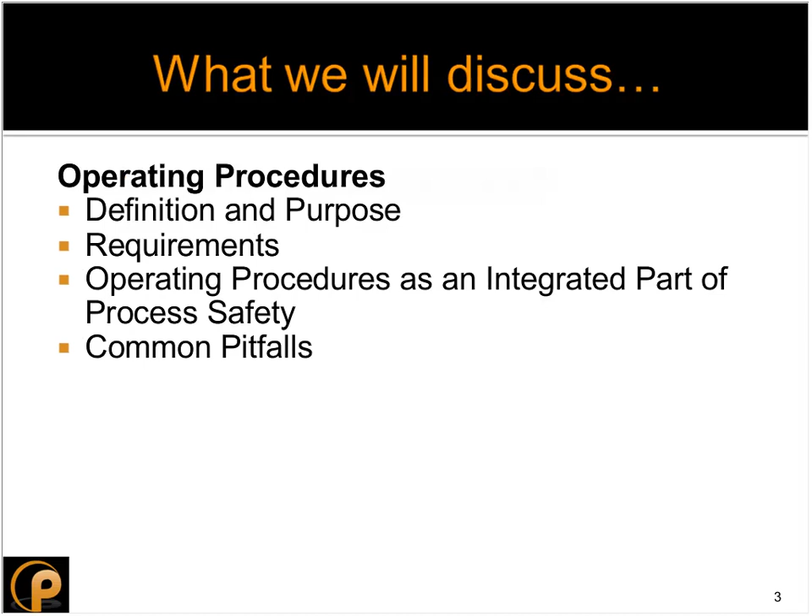Today we're going to discuss operating procedures: what the definition is, what their purpose is, what the requirements of operating procedures are, because you can't just write whatever you want. We're going to talk about how operating procedures are an integrated part of process safety management, common pitfalls associated with operating procedures. We're going to go through some case studies. We're going to talk about training personnel, what's required for training personnel, and also some of our recommendations for training. We'll talk about long-term management of operating procedures. We'll provide a summary, and then we'll have some time for questions and answers.

In general, the information I'm going to talk about today is going to seem very common. It's going to make a lot of sense. I'm not going to need to convince you a whole lot. It's not that you're going to be learning something new that you can't agree with. I think what will be iterated throughout this presentation is that even though the things we discuss about operating procedures, all the good stuff and good reasons we have for having them, that's not the important part. The important part is that it's hardly ever practiced. We talk about all these great things we can do with operating procedures, but the problem is that a lot of institutions and organizations don't implement good practices.

I do have a couple of objectives from today's presentation. The first is that everybody understands why operating procedures are essential to safe operation of any facility. Understand what OSHA's requirements are, especially with regard to PSM, for PSM-covered facilities like refineries or chemical plants here in the United States. And then also for the audience to become aware of problems and pitfalls and some case studies associated with bad operating procedures.

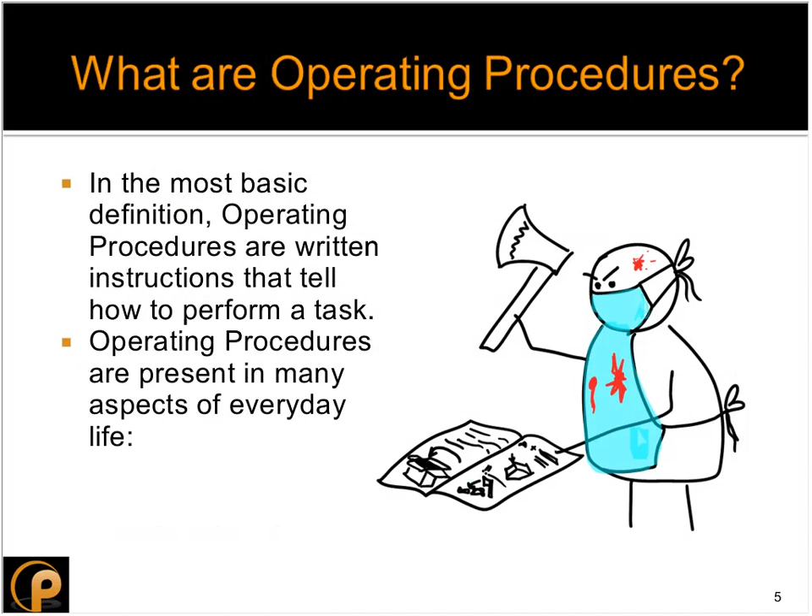So what are operating procedures? The most basic definition of an operating procedure is a written instruction set that tells you how to do something. We see it in every aspect of our lives, not just at work, but at home - cookbooks, putting together furniture, medical procedures that doctors follow. They don't just think about it on the fly. There's a procedure to go through.

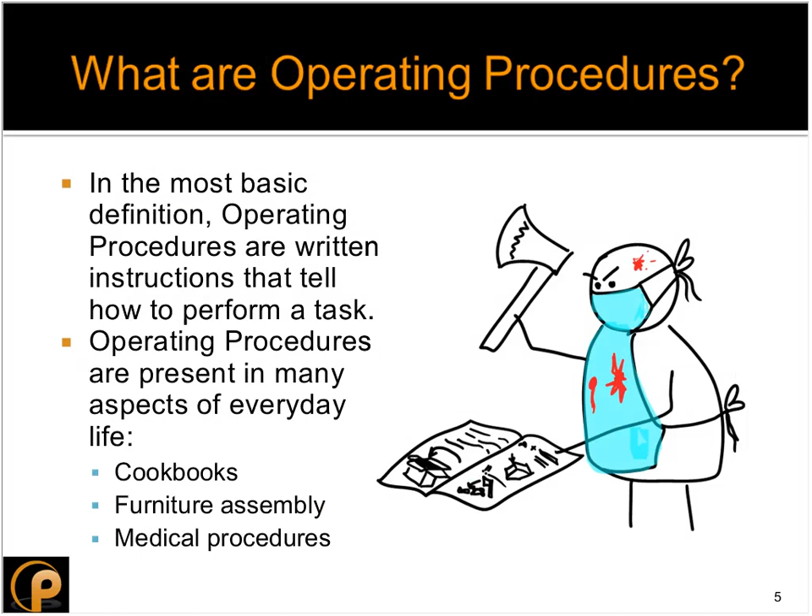All of the tasks have one thing in common: the results should match the intent of the operating procedure. And so it's important that operating procedures produce safe, reliable, and repeatable results.

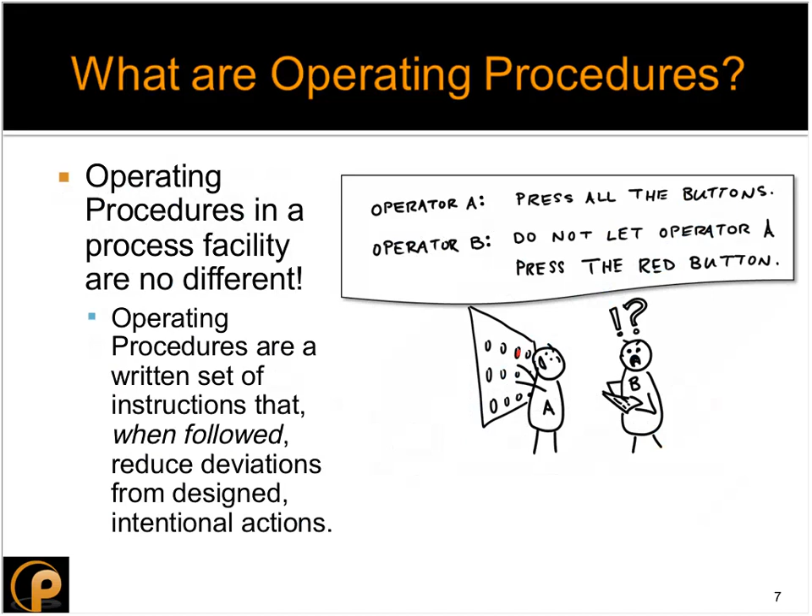Operating procedures in a process facility like a chemical plant or a refinery or a production platform or any other place like that is no different. You want to make sure that those operating procedures, when they're followed, reduce deviation from designed intentional actions.

Why do we need operating procedures? Well, I think some of this is going to be really obvious. First, to ensure safe operations. You want to make sure that people go home just as well as they came to work or even better by preventing injuries and problems with health. You also want to communicate health and safety precautions to folks as they're doing their daily routines.

You want to ensure consistent product quality because you always want to follow a given set of instructions and the given timing associated with your process to make sure that the product comes out at an acceptable quality level. It's also to protect profitability.

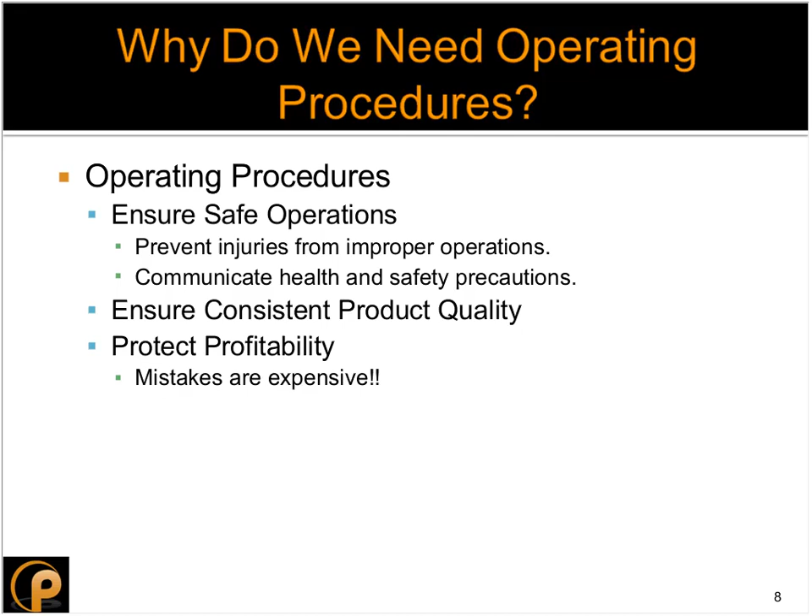So not only do we have to worry about people's health and people's livelihood, we need to make sure that we treat our processes correctly, treat our equipment the way that it should be treated according to procedures so that we don't have a mistake, so we don't have an accident, explosion, something that damages our property or worse, hurt somebody, because when that happens, it's really expensive. We also want to establish accountability. So well-written instructions will tell you exactly who is supposed to perform which step.

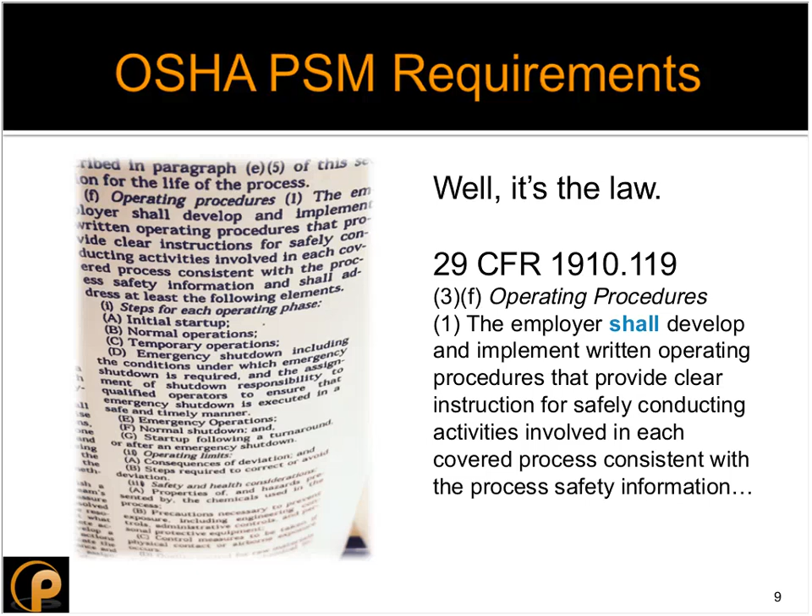And the other reason, of course, is because of regulatory compliance. It's the law, and it says it plain as day in 29 CFR 1910.119. That's the long-form version of the PSM standard. It's a federal law. It's what OSHA enforces for PSM-covered facilities, and it's plain as day in Section 3F. Operating procedures: the employer shall develop and implement written operating procedures, period.

So why does PSM require operating procedures? Well, kind of like we said before, we want to protect personnel from injuries and fatalities. And because not following standard operating procedures can lead to operators or users performing steps incorrectly or inconsistently, which can lead to problems, incidents, loss of containment, fires.

Operating procedures, according to OSHA PSM, are required for numerous different activities, including but not limited to initial startup, normal operation, temporary operation, emergency shutdown, emergency operations, normal shutdown, startup following a turnaround or after an emergency shutdown, all types of situations. You want to make sure that you have the right set of instructions for whatever situation your facility is running in.

In addition to that, the operating procedures must also provide clear instructions on how to do stuff. They've got to be readily accessible. You can't rely on somebody having to run to a library half a plant away to go find operating instructions. They need to be able to find those procedures where they're working.

Those operating procedures need to contain the operating limits and the consequences of deviation. It's fine to tell somebody, follow step 1, then follow step 2, but it's also important to say if you don't follow step 1 and you don't follow step 2, bad things can happen.

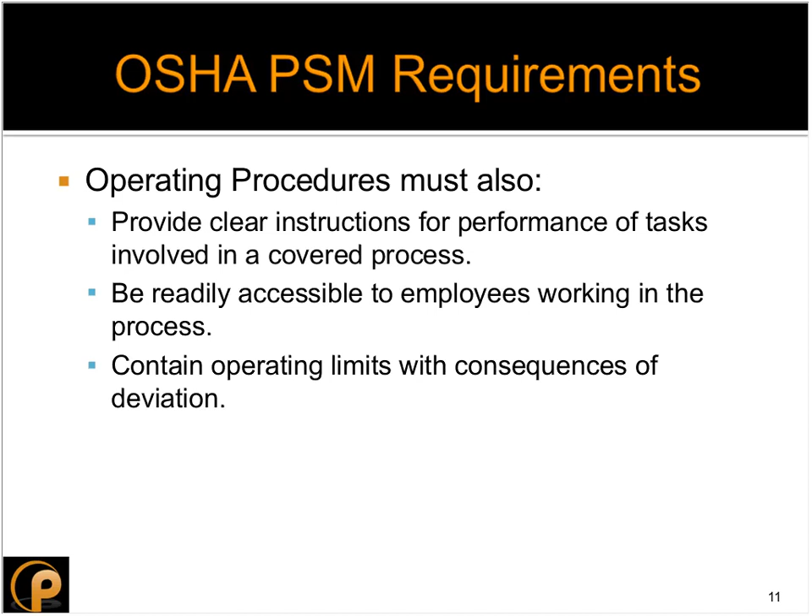It's important to detail the safety and health hazards and considerations. So for instance, for a given task, you may require certain PPE, certain things to protect yourself, goggles, hard hats, steel-toe boots, things like that. So it's important that those operating procedures also tell you what type of tools, equipment, and PPE you need before you start performing a task.

And also there needs to be a certification process that has a frequency of at least 1 year. You need to not only check the procedures and make sure that they're right, but also check that the users are familiar with the procedures, know where to find them, and know how to follow those procedures.

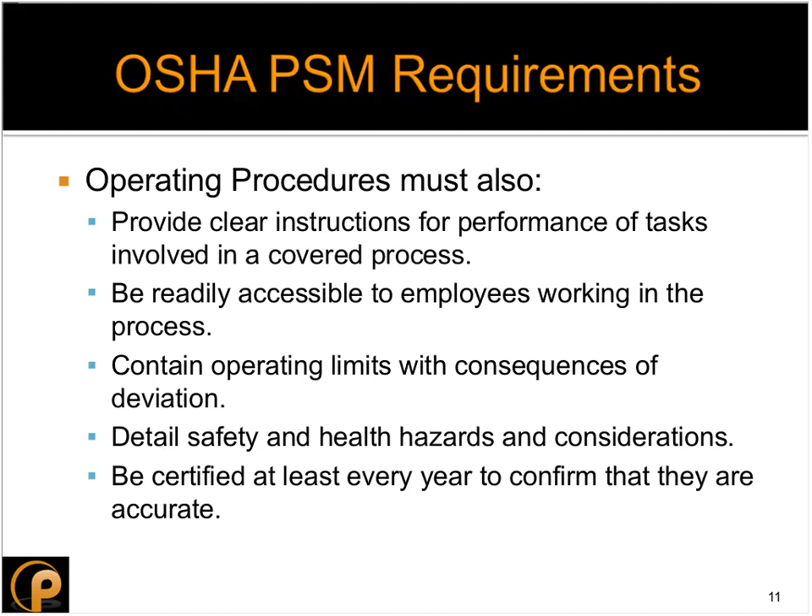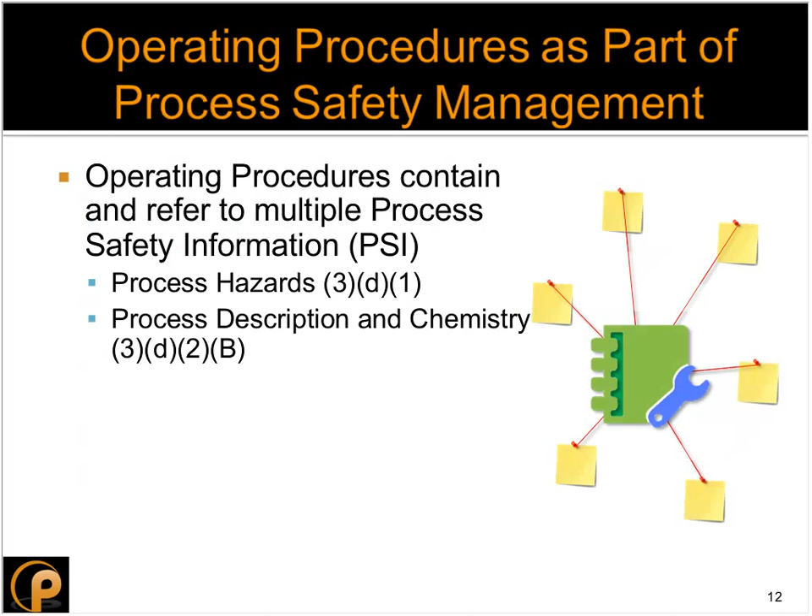With respect to the rest of process safety management, you can think of operating procedures as one component of OSHA's PSM standard. Well, it's not just a component by itself that sits in a vacuum. It relies on and contains multiple other components of process safety management, including PSI. So for instance, your operating procedures are going to make reference to the process hazards, which is covered in PSI section 3D1. It also has to contain the process description and the chemistry involved, the operating limits.

You can't run too hot, you can't run too cold, your pressure can't be too high, it can't be too low. It needs to include the consequences of deviation. It needs to contain information on interlock controls, things that are automatically there to keep you safe. It also needs to include information on the process equipment that users are going to be manipulating.

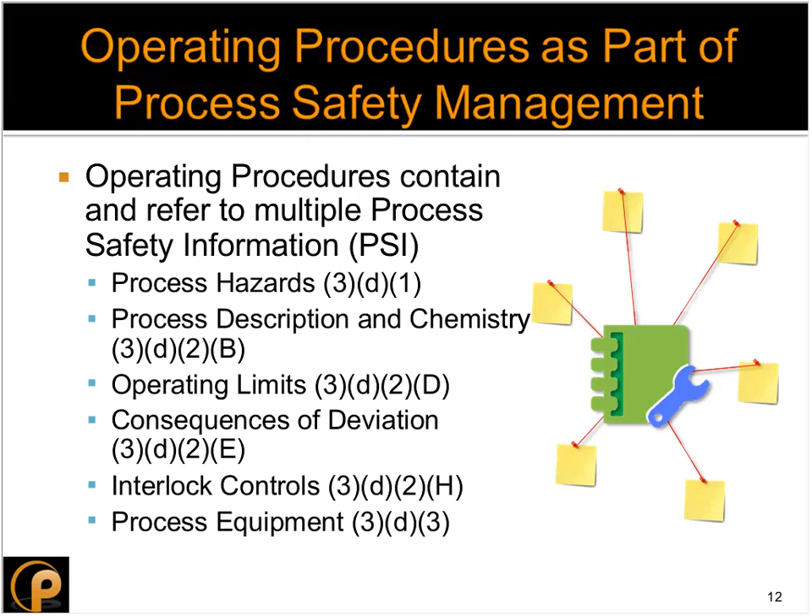In addition to PSI, it's also part of the MOC process. So whenever there's a change to a process, a healthy or robust MOC program will pick up the changes to the process. It'll make updates to the PSI, for instance, your P&IDs or your process chemistry. Likewise, that MOC process should also recognize that if there's changes to the process, there may be changes to the operating procedures.

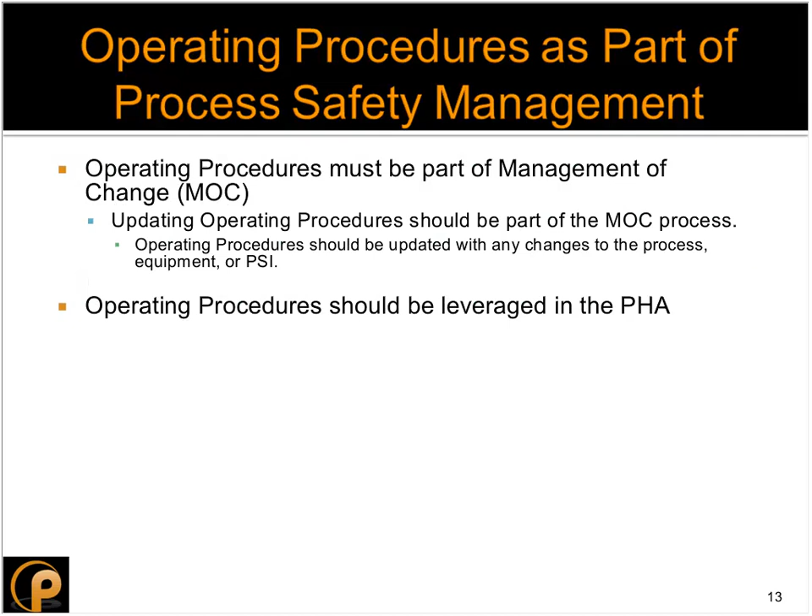And in addition to MOC and PSI, you can also leverage those operating procedures in a PHA, a process hazard analysis. And why? Well, because those operating procedures describe the task that the users are performing. It talks about the consequences of doing the wrong thing at the wrong time or not taking a certain step. It lists the consequences of going outside of design limits, outside of your safe zones. Talks about critical procedures that may be taken as safeguards in certain situations.

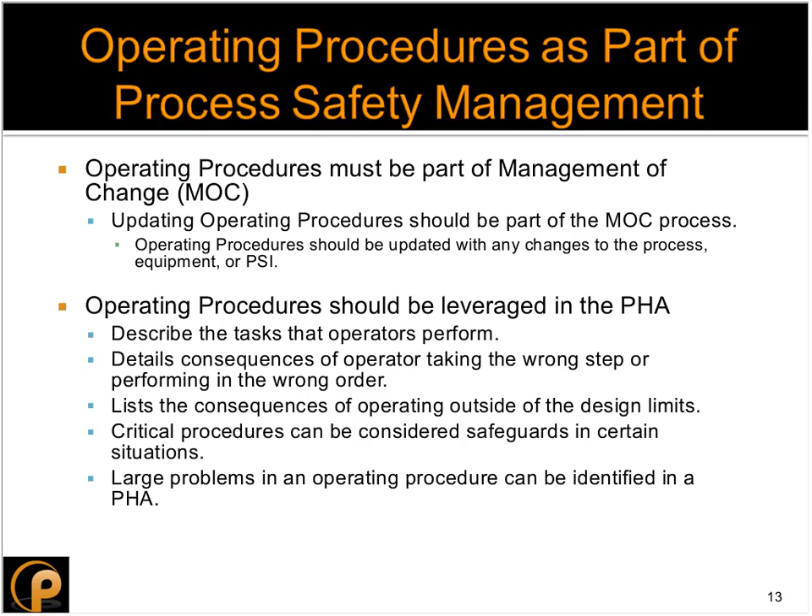And then when you're taking a look at operating procedures, not with the mindset of I'm just here to update the operating procedures, but when you're taking a look at it with cold eyes during a PHA, you might be able to see systemic problems in your operating procedures just because you're taking it out of its normal context and looking at it in a PHA.

Moving on to common pitfalls. So I've talked about all of this stuff that makes operating procedures so great, and it makes so much sense, and I don't need to convince anybody that all of those things are good ideas or are necessary. But what are some of the problems associated with operating procedures? Well, the biggest problem is people not using them.

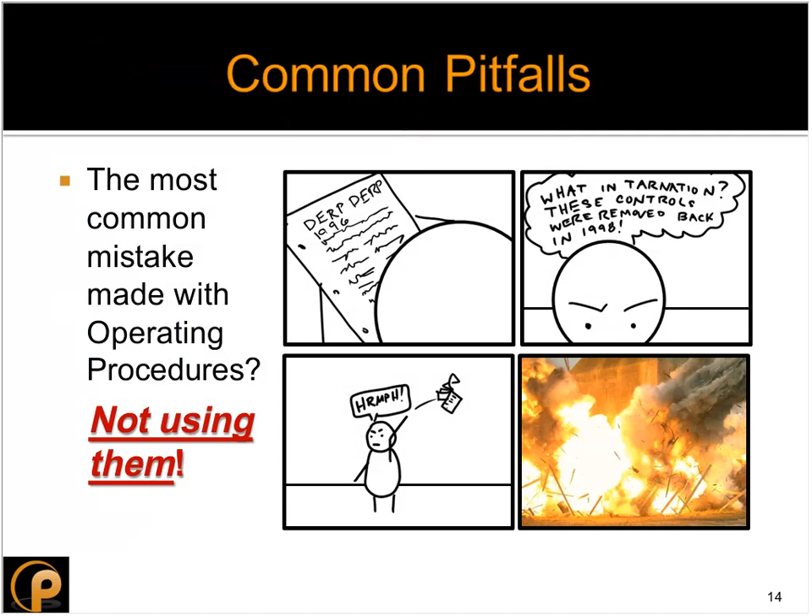There's a couple of factors that lead to operating procedure disuse, and these are things that I think may resonate with those of you out there that are working in operating facilities. It's certainly things that I've seen in my experience. First and foremost, procedures get outdated. They're not updated when things change, and they're kind of left to themselves and left to crumble and rot. Old procedures may have incorrect set points, incorrect operating conditions.

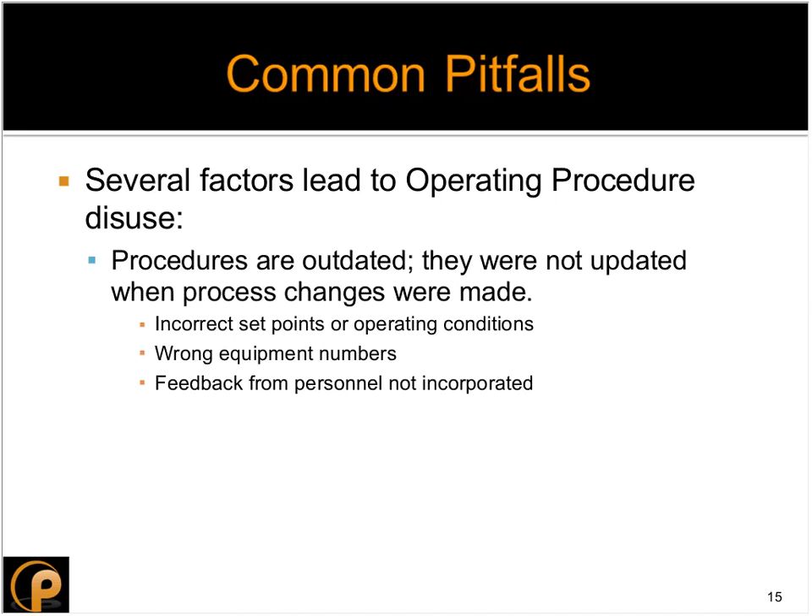Maybe you changed all the equipment tags in your plant a long time ago, and so the equipment numbers don't make any sense anymore. And then after some period of use, operators get used to doing things a certain way, and so they say, hey, these operating procedures need to be updated based on how we actually do our work, because we think doing it in this form and fashion makes more sense. But those operating procedures never get corrected, and they never incorporate that important feedback from operators.

What else? Employees may not know where to go to locate the procedures, and they may be out of date. They go to a place, they've been going to it for years, but maybe that's not the place where the updated operating procedures are. Maybe it's been changed to a different location and people didn't know it.

Operating procedures that are too wordy, complex, or have language that is way too descriptive. I think engineers have a tendency to make things overly complicated and overly detailed because you want to make sure that it contains all the information that somebody could possibly want to see. And so when engineers write operating procedures in a vacuum, they produce these pages of rich text full of all of this great information.

And if you take a piece of paper and hold it away from your face, maybe a foot or two away, it just looks like a gray blob. Well, yeah, it's great. It contains all that wonderful information. But if you need to use it in the field, you don't want to spend the time to look at something that looks like a gray blob. It needs to be written with concise language.

On the flip side, there may be operating procedures that are written very poorly, that have grammatical errors, syntax errors, all sorts of erroneous information or poorly written information that people can't understand. What else? Employees may not know when to use those operating procedures because it doesn't clearly say who is supposed to be performing which step. It doesn't establish ownership. It doesn't establish who should be doing what.

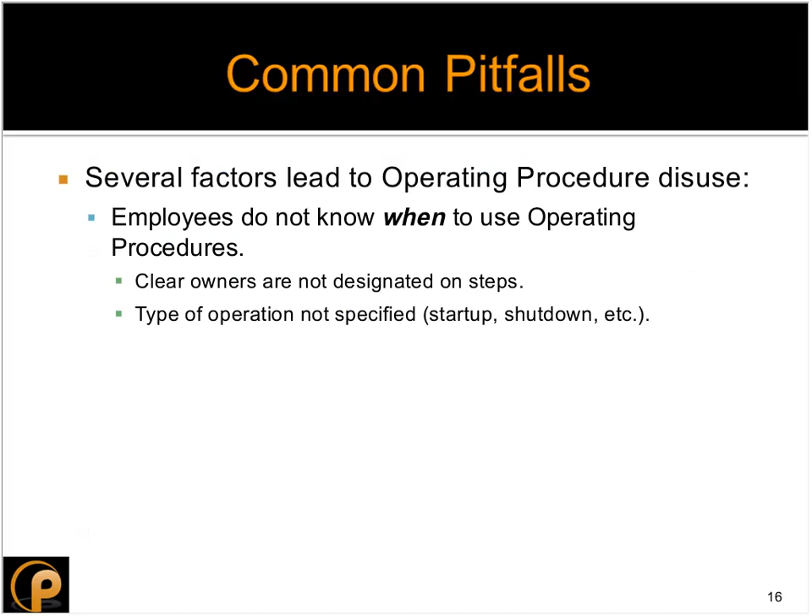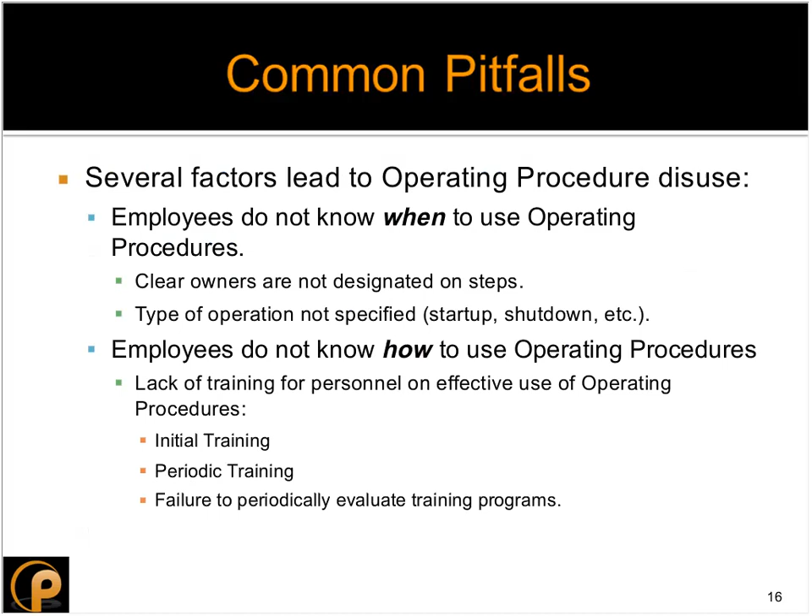And then another problem, employees don't know how to use the operating procedures. You could have the best operating procedures in the world, but if you don't train anybody how to use them, then they may as well be useless.

Extremely long and intricate procedures also kind of ties into those overly wordy and complex ones, where you have pages of gray blobs. And if it's overly long and takes too long to do, that may lend itself to operators bypassing the instructions, cutting corners in order to get their work done. Time constraints lay on everybody, and so if something is too difficult or too time-consuming to take care of, people are going to cut corners.

One bit of advice is that if you've got a really risky sort of process and the procedures to control or operate that process are very complex, or they take a long time, or the process in general is just really, really risky, you may want to consider changing the process, not changing the procedures, but going back to an inherently safer design mindset and changing the process.

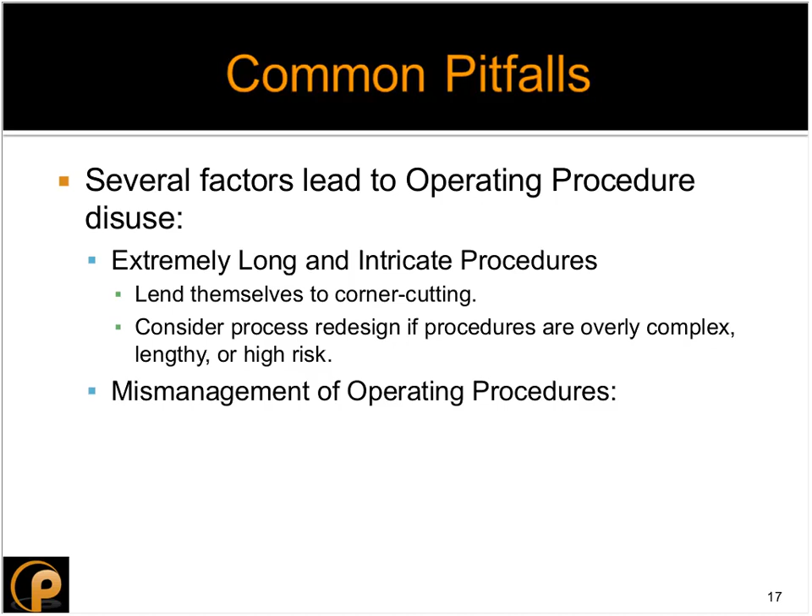Additional pitfalls: mismanagement of operating procedures. So using old, outdated paper-based systems, not making that leap into an electronic-based system, not maintaining a centralized location, which goes back to employees not being able to find them, and then not effectively tracking changes made in new revisions.

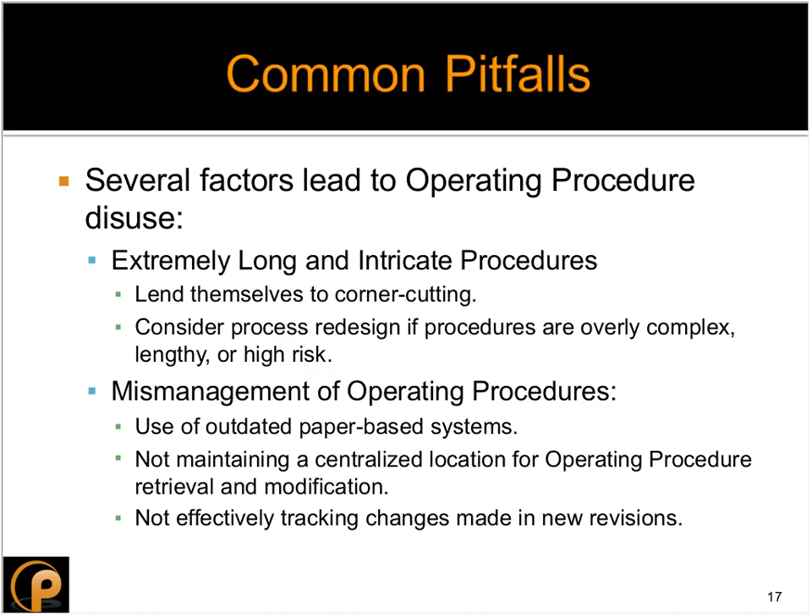I can sit here and complain all day long about bad operating procedures, but complaining about it doesn't solve the problem, not a bit. And so I think this is maybe the difficult part: how do you overcome those problems? The first thing is you have to understand that it will take time. You've got to just admit it to yourself that fixing a problem with operating procedures does take time. It's not going to fix itself overnight, and nobody else is necessarily going to fix it.

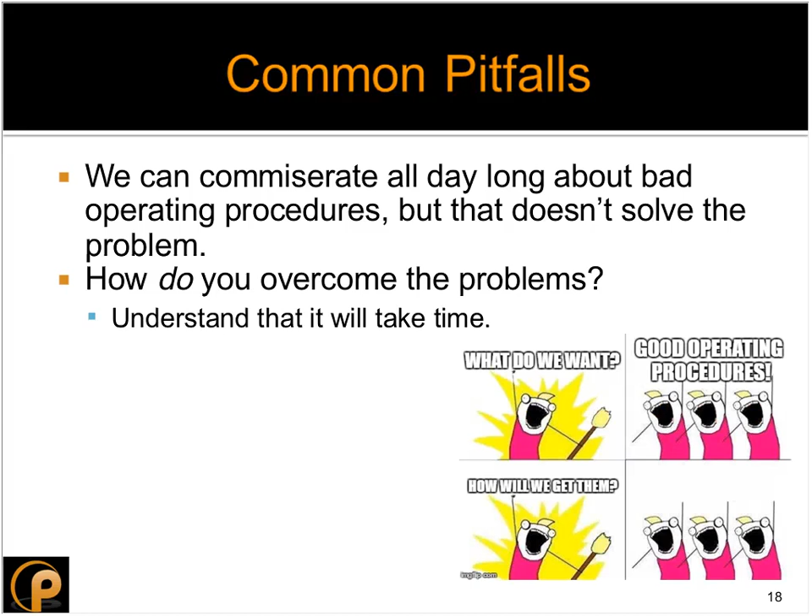If you really want to make a difference, it's probably important that you gain the backing of your supervision by using convincing arguments. You could use this webinar if you wanted to, or you could use some of the case studies that we're going to talk about. You've got to own the problem. If nobody else is going to own the problem of having bad operating procedures, somebody has to. So why don't you? There's no magic bullets to this. It's just perseverance. It's sticking it through and seeing it to completion.

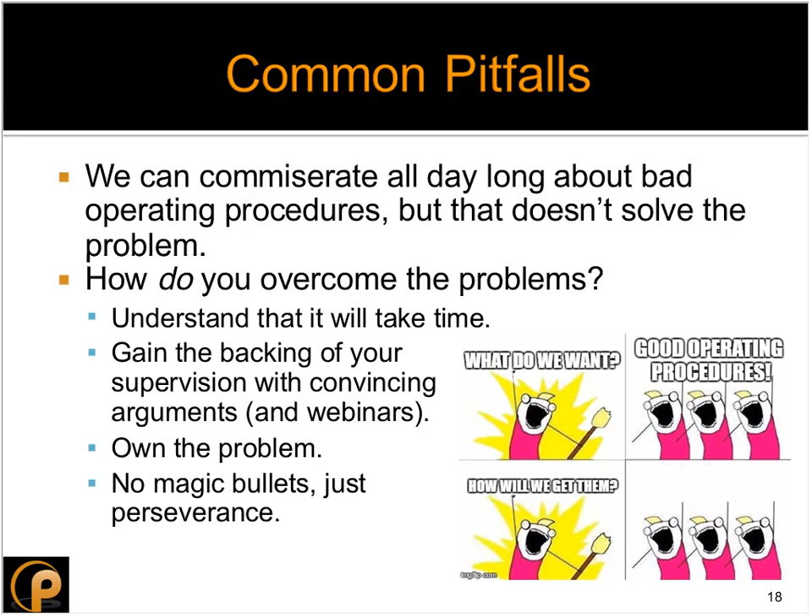We're going to talk about some case studies. For those of you not familiar with CSB, CSB is the Chemical Safety Board. They do a lot of great work, and they have a lot of very valuable information for our industries, for chemical engineering industries, refining, production, chemical plants, specialty chemicals, all kinds of great stuff.

There was a study that CSB did a number of years ago on 167 serious incidents involving just chemical reactions, like runaway reactions and that sort of thing. It spanned from like the 80s through maybe the early 2000s. What they found in all of those incidents was a lot of common causal factors, but in 50% of those cases, they found that inadequate, missing, or otherwise bad operating procedures could be attributed to those incidents. So if there were good operating procedures, it could have mitigated that number.

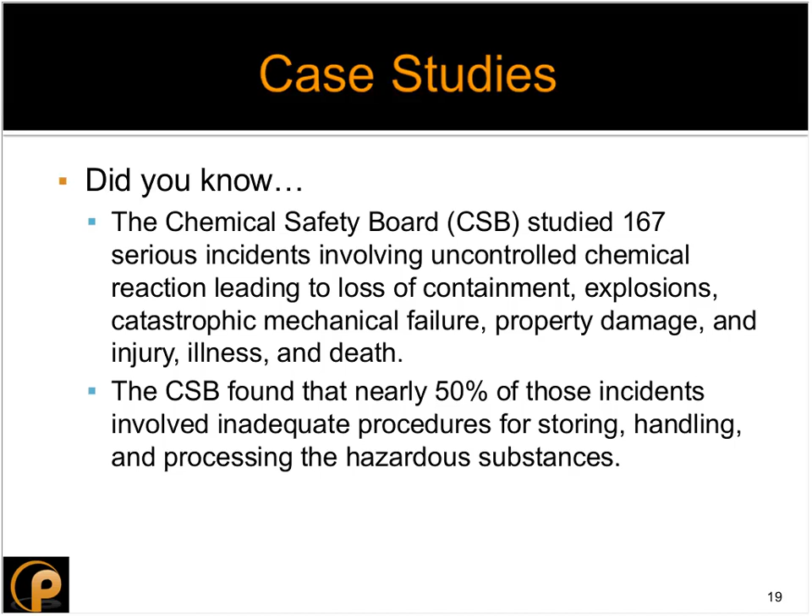Talking about some individual case studies, there was one in Pitkin, Louisiana, a number of years ago by Sonat Exploration Company. I don't know if Sonat exists anymore. I think it may be owned by El Paso now. A number of years ago, they were performing some sort of procedure. I think they were blowing down a line or a vessel. Workers at this facility did not have written operating procedures on how to align valves correctly for a purging operation. What was the outcome?

Well, they inadvertently introduced high-pressure flammable gas into a low-pressure system that was not protected with a PSV. So there's a number of problems here. Low-pressure system not protected by a PSV, so there's inadequate relief systems. But also, there's not an operating procedure to tell people how to open the valves and in which order to do it. And so guesswork led to 4 fatalities.

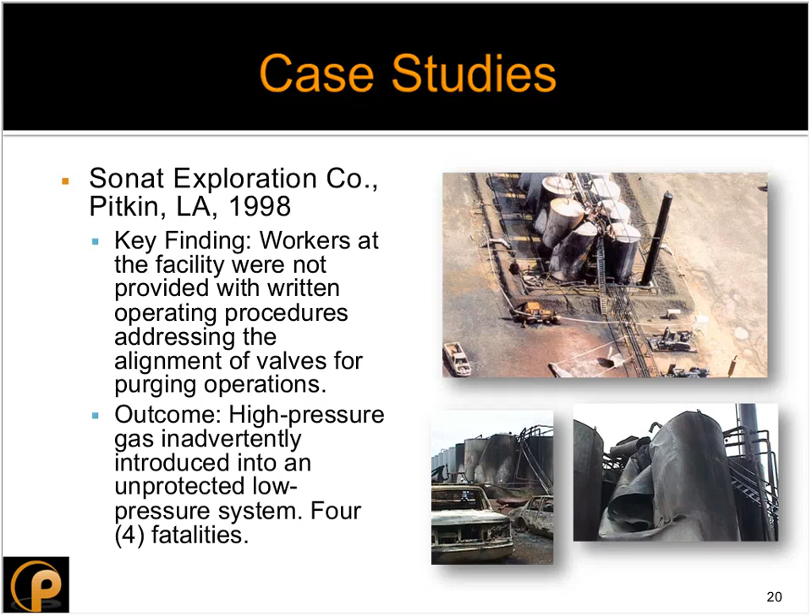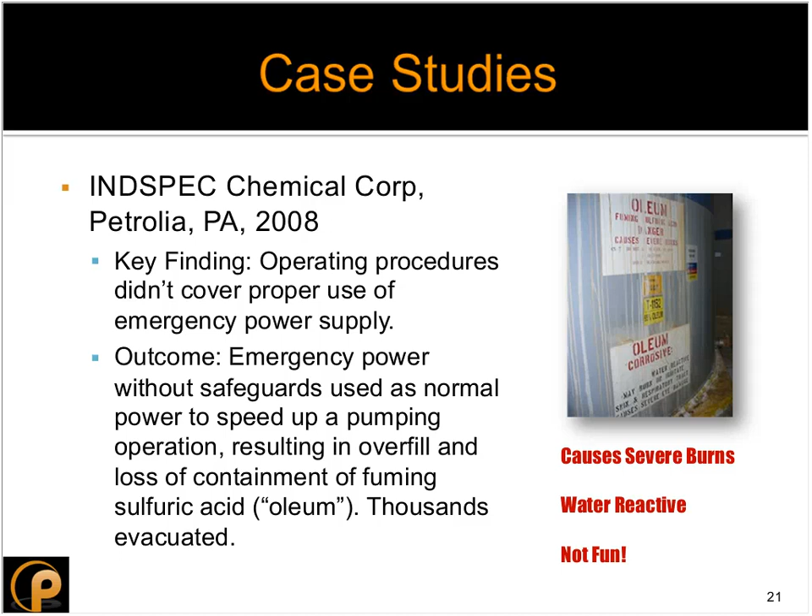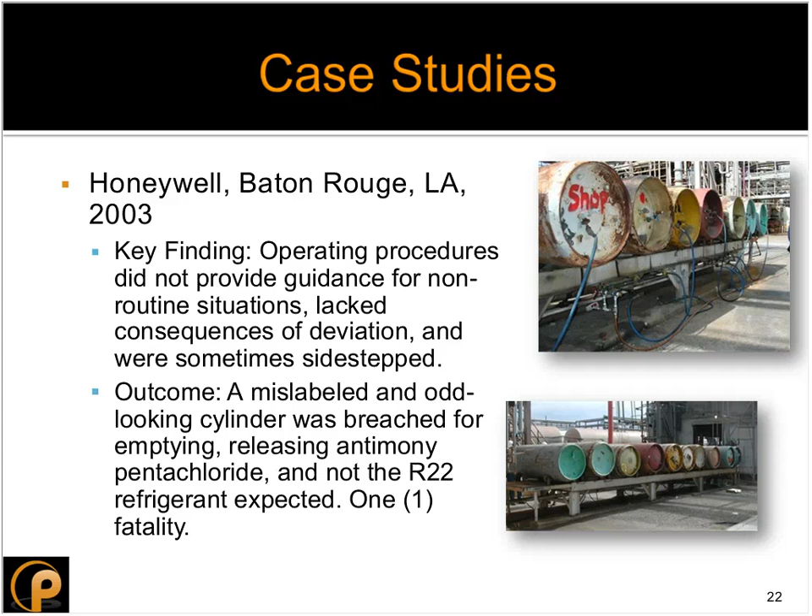A few days later, at the same facility, after they had some emergency shutdowns because of another incident about 20 days prior, they were getting everything started back up and found that one of their exchangers had leftover hydrogen fluoride in it, which they needed to get out before startup. There was no drain system they could use, so they used an ad hoc Venturi stick—like a bug sprayer, you pump it up, pull the trigger, and it squirts out based on the air pressure you've added to the system.

They did a similar setup here, but there were no specific operating procedures on draining hydrogen fluoride from the process equipment with a Venturi stick. People knew how to jury-rig a Venturi stick, but there was no fixed operating procedure on how to do it for this piece of equipment in this part of the process. As a result, this ad hoc, jury-rigged setup did not adequately control the hazard.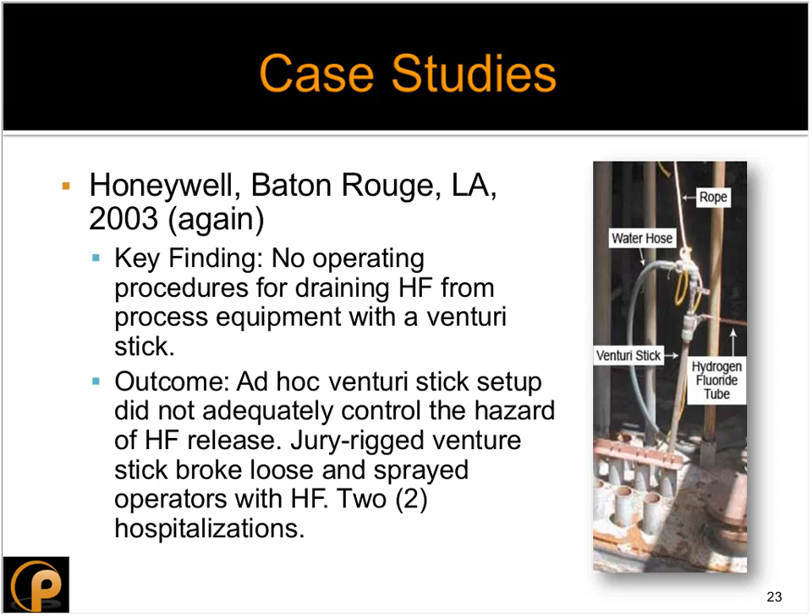It kind of broke loose—there was a hose, which you can see in the picture on the right-hand side. That hose became loose and started whipping around, spraying operators with hydrogen fluoride, which is not good. It required two hospitalizations. Thankfully nobody died, but that was not a good summer for Honeywell.

Continuing on to other places where operating procedures didn't work out: Central Illinois Public Service Company—although I don't think they're PSM covered, this is still like a power generation plant. They've got cooling water systems that require acid in some cases and bases in others. A sodium hydroxide truck driver came in and did not follow the operating procedures meant to prevent inadvertently mixing it with H2SO4, because CIPS realized that you can't mix these two things.

They realized that mixing them causes a violent reaction, but the truck driver did not follow the procedures and inadvertently hooked up the sodium hydroxide into the H2SO4 tank and just let it rip. Unfortunately, concentrated sodium hydroxide pumped into the concentrated sulfuric acid resulted in an explosion. Thankfully nobody died, but there was one hospitalization required.

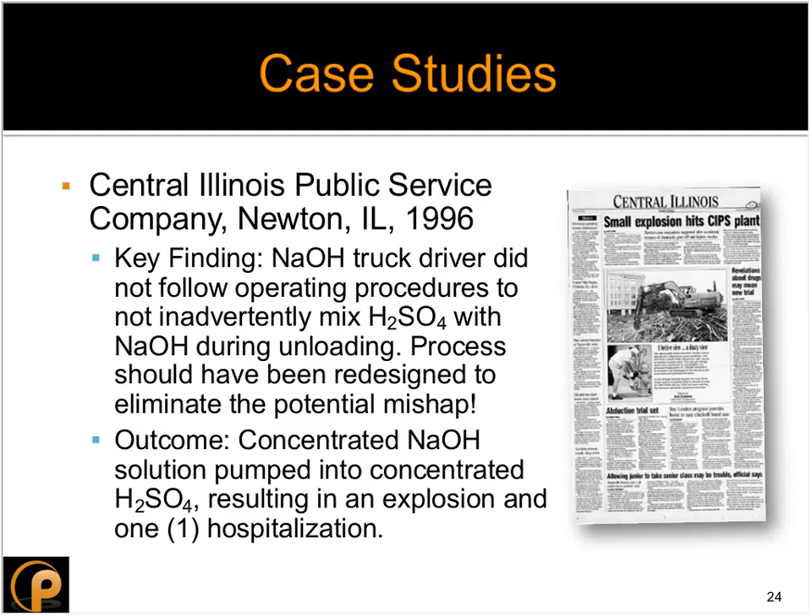Moving on to something more recent, with the company undisclosed in the information I could find, this happened in Singapore in 2013. Nobody died, but in this case operating procedures were made, edited, and heavily revised, but not followed correctly during a batch production of acetylated lanolin. The outcome was that the operator misread those operating procedures, accidentally added too much reactant, which led to a runaway reaction downstream and blew apart a condenser. Fortunately, there were no injuries.

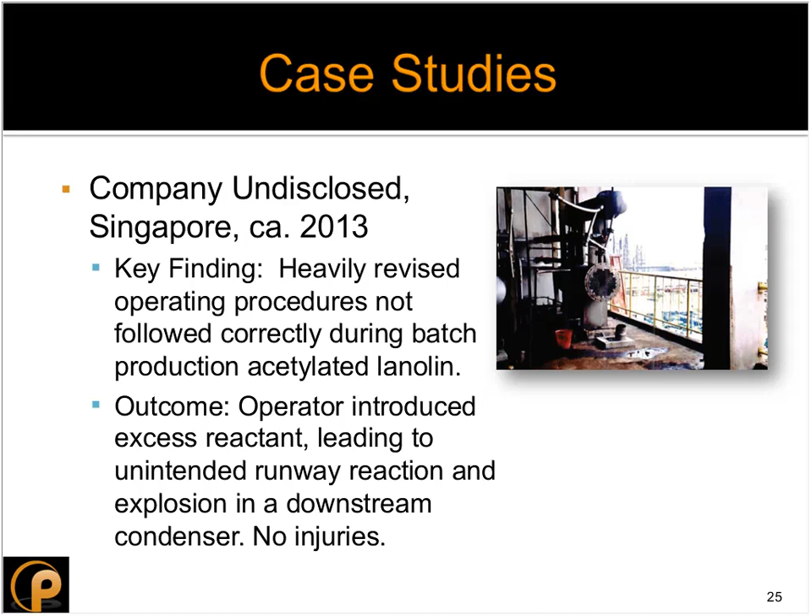That last case study highlights that you can have awesome procedures, but if you don't train folks when procedures change, then you might wind up in trouble.

Training complements operating procedures, it just makes it more complete. And really, if you think about it, it's just one big feedback loop. Before there were operating procedures, there was just practical use, like you did the process following certain steps. Eventually somebody wrote it down and that turned into development. So after you develop procedures, you do in-class training and then field training, and then you use them practically and provide more feedback.

Operating procedures need to be succinct. They need to be short, sweet, and simple. They can't be overly complex. They need to have just the right amount of information for somebody to perform a task.

The thing that fills in the blanks for folks is the training. And what enriches training is experienced instructors that can expand on that in-class and field training with practical real-world examples. So from practical use comes feedback into development, and also from practical use comes enrichment that you can add to training, whether in class or in the field.

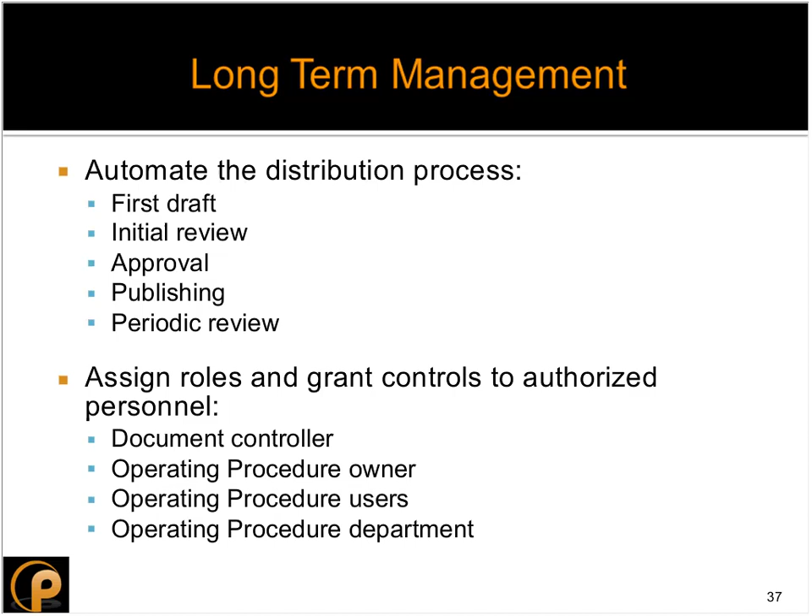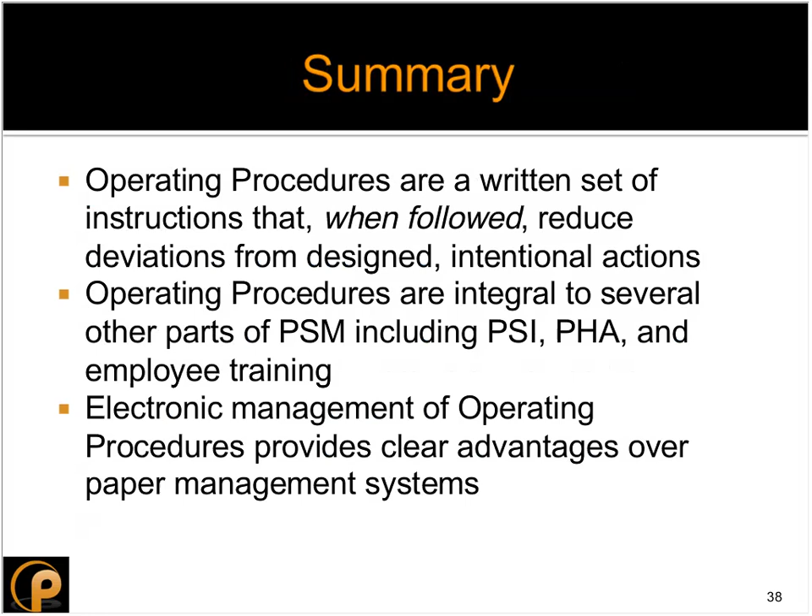Moving on into summary, to capture everything one more time: Operating procedures are a written set of instructions that, when you follow them, reduce deviation from designed intentional actions. They're an integral part of several other parts of the PSM standard, including process safety information, process hazard analysis, and employee training, not to mention MOCs. And electronic management systems used for operating procedures have very clear advantages over paper-based management systems.

Where can you learn more? There's a couple of places. AICHE CCPS has a really good reference book. It's a little dated, but it's still pretty good. It's called Guidelines for Writing Effective Operating and Maintenance Procedures. And then there's a little bit more of a contemporary reference, a technical book by Sutton: Process, Risk, and Reliability Management, 2nd edition. Sutton also has an e-book specific to operating procedures on the Sutton website. I'm sure you can do a Google search and find it.